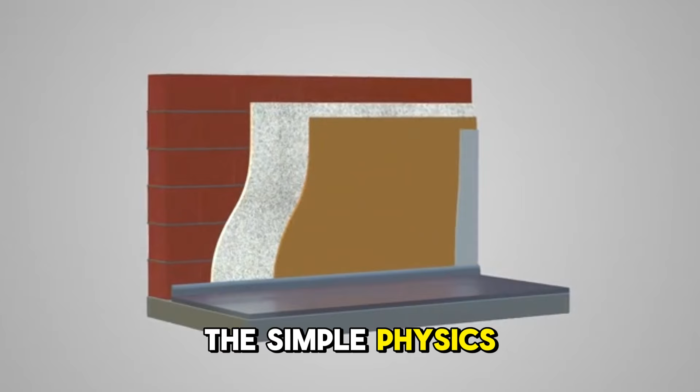Their secret wasn't magic or unlimited fuel. In fact, they had far less fuel than we do today. Their secret was thermal mass, the simple physics principle that modern heating has completely abandoned. Your metal stove gets blazing hot, heats the room for 2 hours, then goes cold.

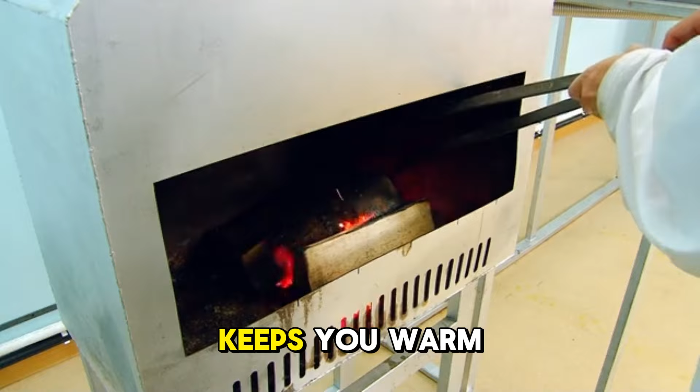Their brick ovens absorbed that same heat into thousands of pounds of masonry, then released it slowly throughout the entire day and night. Same fire, same fuel. But one keeps you warm for 2 hours, while the other keeps you warm for 24. The difference is physics that modern heating forgot.

Number 1. The wartime heating crisis. World War 2 created heating emergencies across every combatant nation that forced families to rediscover what their grandparents already knew. Coal, oil, and natural gas all went to military and industrial production first, leaving civilian populations with fractions of their

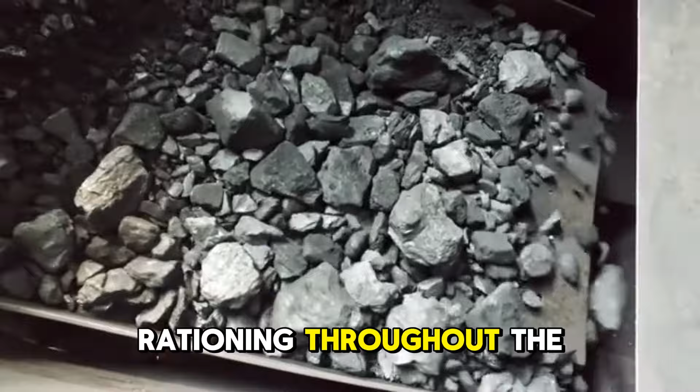normal fuel allocations. The Ministry of Fuel and Power in Britain implemented strict coal rationing throughout the war, and average households received nowhere near enough fuel to heat their homes using conventional methods. Germany faced even worse conditions as Allied bombing disrupted coal production and distribution networks. By the war's end, wood had become the primary heating fuel for many German civilians because nothing else remained available.

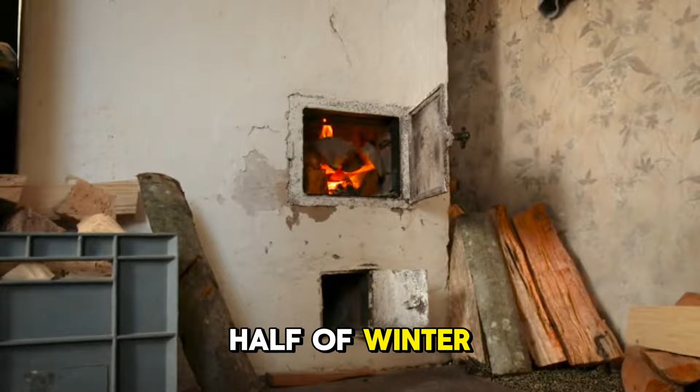The Soviet Union, Scandinavia, and Eastern Europe all confronted similar shortages that made every piece of fuel precious beyond modern imagination. Families with conventional metal stoves faced impossible choices: burn your entire fuel allocation in the first half of winter and freeze in the second half, or ration fuel so severely that you never actually get warm.

The physics of metal stoves made efficiency impossible. Hot metal radiates heat rapidly, meaning the fire must burn continuously to maintain room temperature. Stop feeding the fire, and the room goes cold within hours. But families with traditional masonry heaters experienced something entirely different.

One intense fire in the morning heated thousands of pounds of brick and stone to temperatures that remained comfortable to touch. That mass then radiated warmth steadily throughout the day and into the night, maintaining livable temperatures without any additional fuel, while neighbors with metal stoves shivered through the night. Families with masonry heaters slept warm under the gentle radiance of heat stored in brick.

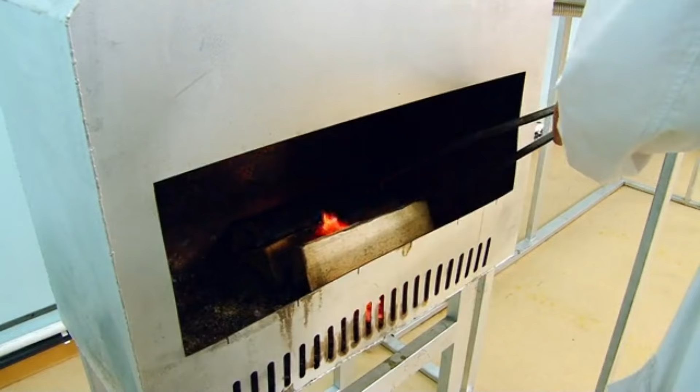The technology that saved those families wasn't new or experimental. Masonry heaters had heated European homes for centuries before the war. The physics was well understood, the construction techniques refined over generations, and the fuel savings documented by anyone who compared the two approaches. What the war did was reveal, under desperate conditions, which heating technology actually worked when fuel became scarce.

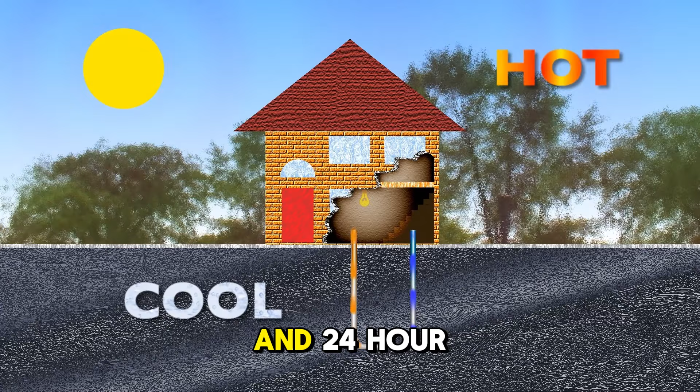Number 2, the physics of thermal mass. The difference between 2-hour heating and 24-hour heating comes down to a simple physics principle that modern heating systems have completely abandoned. Dense materials like brick, stone, and concrete absorb heat energy and store it within their mass. Once heated, these materials release that stored energy slowly through radiation, providing warmth long after the original fire has burned out.

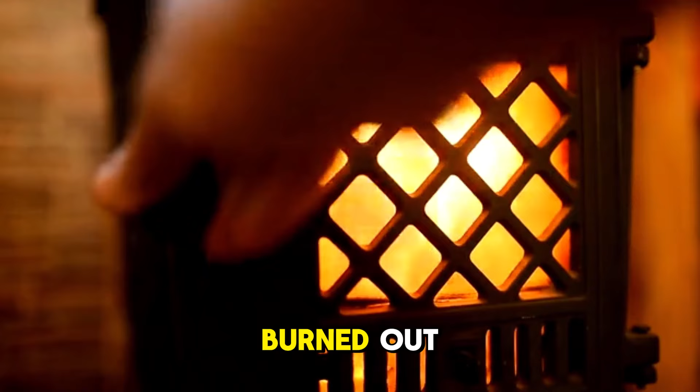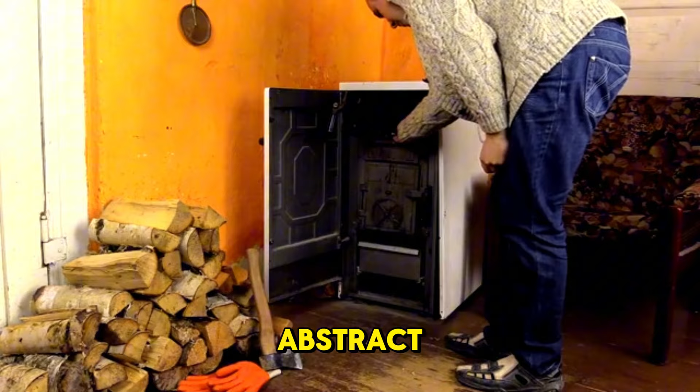The technical term is specific heat capacity, which measures how much energy a material can absorb per unit of mass per degree of temperature increase. Brick holds approximately 0.84 kilojoules per kilogram per degree Kelvin. This might sound abstract, but the practical meaning is profound. A 2,000 kilogram masonry heater raised 65 degrees above room temperature stores over 100,000 kilojoules of energy. That energy has nowhere to go except slowly radiating into the room over the following 12 to 24 hours.

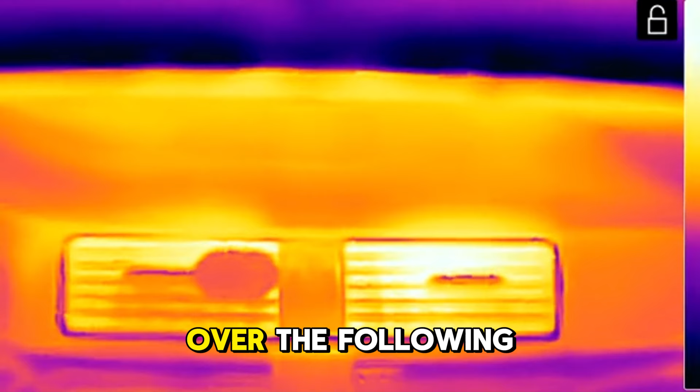Metal behaves completely differently. Steel has similar heat capacity to brick, but metal stoves weigh perhaps 50 kilograms rather than 2,000. The total energy storage capacity is roughly a 40th of what masonry provides. More critically, metal conducts heat extremely efficiently, meaning whatever heat it absorbs reaches the surface and radiates away almost immediately. High surface temperatures accelerate heat loss dramatically, so a metal stove at 600 degrees Fahrenheit loses heat far faster than brick at 200 degrees.

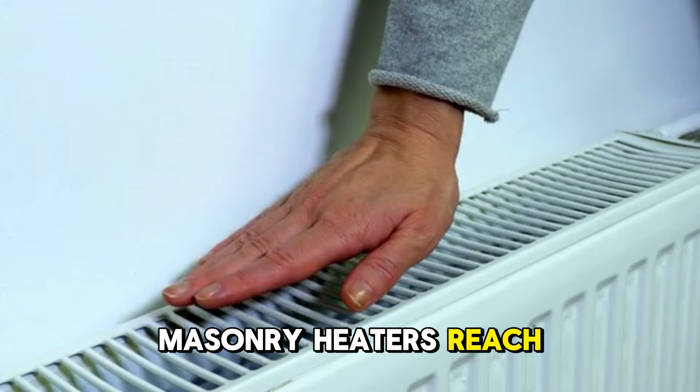This explains the fundamental pattern that wartime families understood intuitively. Metal stoves get dangerously hot while burning, then go cold within hours after the fire dies. Masonry heaters reach comfortable surface temperatures that remain safe to touch, then maintain those temperatures for an entire day because the massive heat reservoir depletes slowly rather than rapidly.

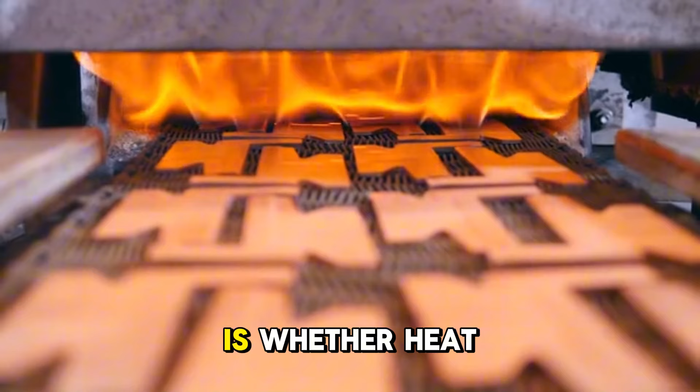The room doesn't know whether heat comes from a metal stove or a masonry heater. What the room knows is whether heat keeps arriving after the fire stops. With metal, it doesn't. With masonry, it does. That difference determines whether you wake up warm or wake up frozen when fuel runs short. Number 3.

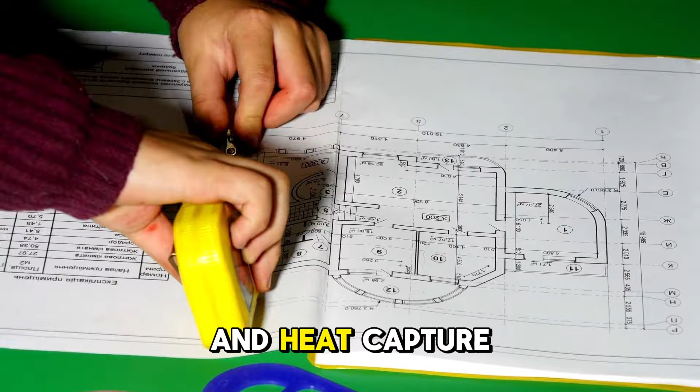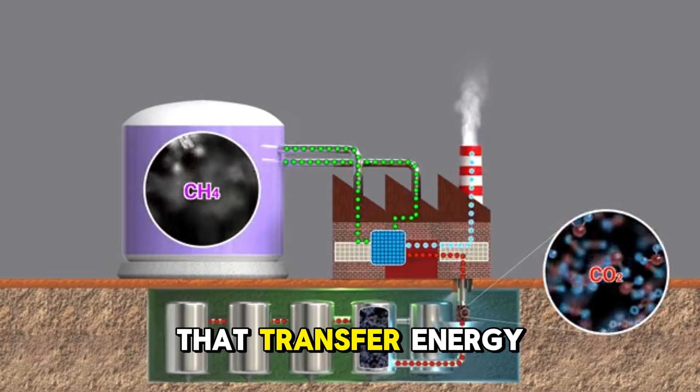How masonry heaters capture and store heat. The engineering of traditional masonry heaters maximizes both combustion efficiency and heat capture through design principles refined over centuries. Unlike metal stoves that send most heat directly up the chimney, masonry heaters force hot gases through extended pathways that transfer energy to surrounding brick before exhaust reaches the outdoors.

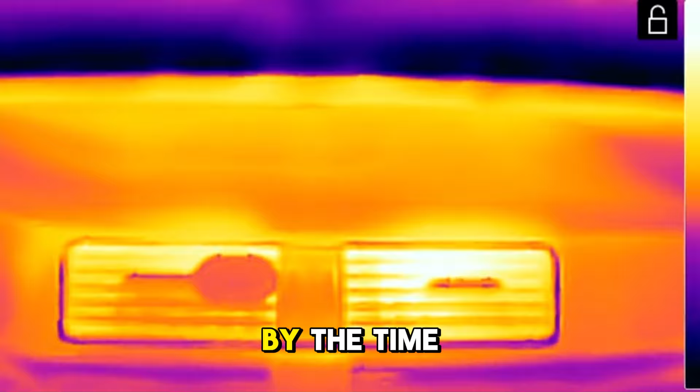The contraflow design represents the most sophisticated approach to heat capture. Hot combustion gases rise from the firebox, then travel through a maze of channels that may extend 20 feet or more before reaching the chimney. At each turn, at each pass through a channel, heat transfers from gas to masonry. By the time exhaust exits the building, its temperature has dropped from over 1,000 degrees Fahrenheit to perhaps 200 or 300. All that extracted heat now resides in the brick mass rather than floating uselessly into the atmosphere.

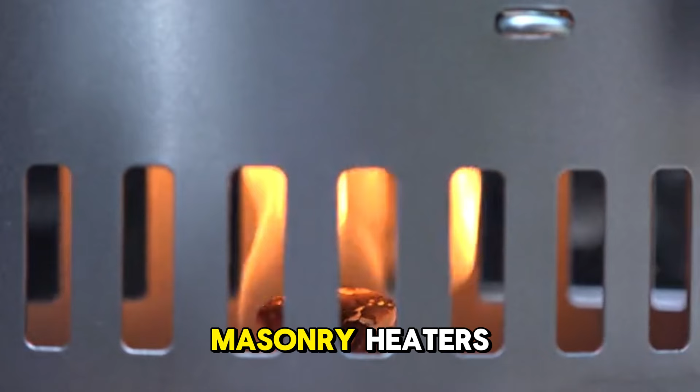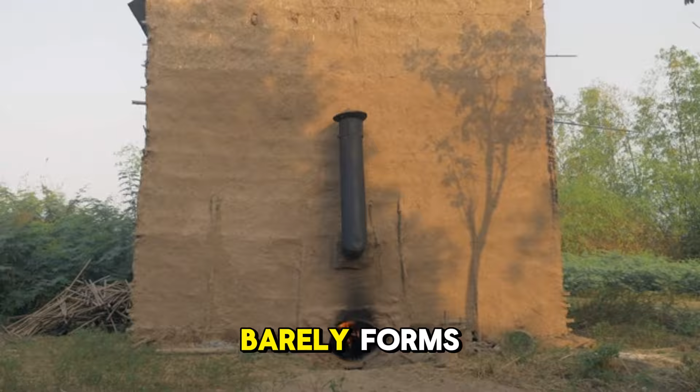Combustion itself operates differently in masonry heaters than in conventional stoves. The firebox is designed for intense, rapid burning at temperatures exceeding 1,100 degrees Fahrenheit. At these temperatures, volatile gases released from burning wood ignite completely rather than escaping as smoke. Creosote, the tarry residue that accumulates in chimneys and causes fires, barely forms because temperatures remain high enough to burn it. Combustion efficiency often exceeds 90%, meaning nearly all energy in the wood converts to heat rather than escaping as unburned fuel.

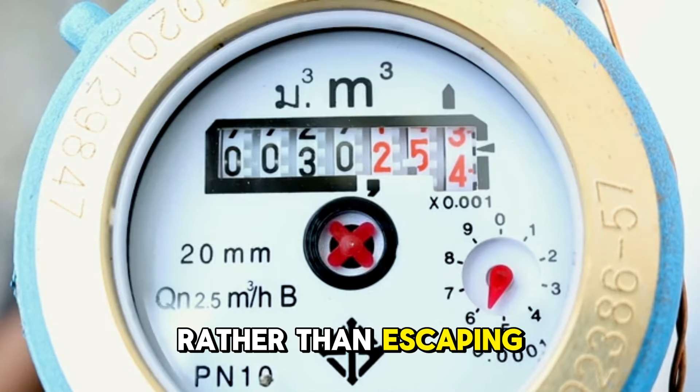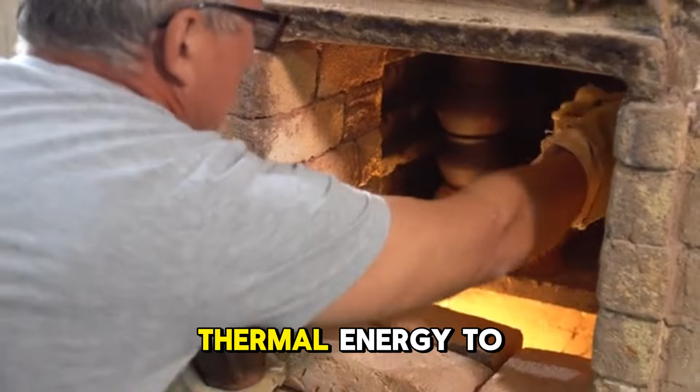A typical firing takes 1 to 3 hours and consumes 20 to 30 pounds of wood. This seems like modest fuel consumption because it is. The magic happens after the fire dies. Those 1,000+ pounds of brick now contain enough thermal energy to warm the room for the next 12 to 24 hours without any additional fuel.

Families fired their masonry heaters once in the morning and once in the evening, using perhaps 40 to 50 pounds of wood daily to maintain comfortable temperatures around the clock. Compare this to conventional metal stoves requiring 50 to 100 pounds of wood daily with constant attention and still producing uncomfortable temperature swings between firings. Same house, same winter, dramatically different fuel consumption and comfort levels.

Number 4. Regional traditions that survived the war. Different European regions developed distinct masonry heater traditions over centuries, each adapted to local climate, available materials, and cultural preferences. When wartime fuel shortages hit, families with these traditional heaters possessed advantages their neighbors with modern metal stoves could not match.

The German Kachelofen, meaning tile oven, features a brick or masonry core covered with decorative ceramic tiles. These heaters often stood built into walls between rooms, allowing a single unit to warm multiple spaces simultaneously. The tiles provided not just decoration but additional thermal mass and radiation surface. German and Austrian homes with Kachelofens maintained warmth through winters when coal deliveries became sporadic or stopped entirely.

Russian families relied on the pechka, a massive combination of stove, oven, and heating mass that often dominated the main room of traditional homes. The largest pechkas included raised sleeping platforms where family members could sleep directly on the warm masonry surface. Cooking, baking, and heating all happened from the same structure, maximizing utility from every piece of fuel burned. When German invasion disrupted fuel supplies, families with traditional pechkas possessed survival advantages that modern heating could not provide.

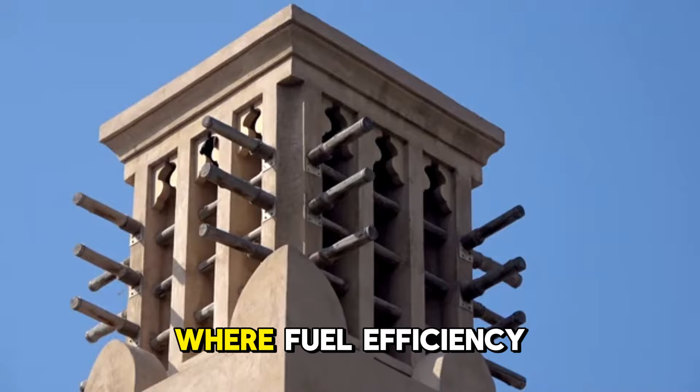Scandinavian countries developed their own refined designs suited to brutal northern winters. The Swedish Kakelugn featured tall, slender proportions that maximized radiation surface while minimizing floor space. Finnish masonry heaters often used soapstone, which holds heat even longer than brick. These designs evolved under conditions where fuel efficiency literally determined survival, producing heaters optimized over generations for maximum heat from minimum wood.

The British tradition differed somewhat, with range cookers like the AGA providing thermal mass through heavy cast iron rather than masonry. These continuous burning cookers stored heat for cooking while also warming the kitchen. Traditional brick bread ovens similarly retained heat for hours after firing, baking multiple batches while also radiating warmth into adjacent rooms. Each tradition survived because it worked under conditions where failure meant freezing.

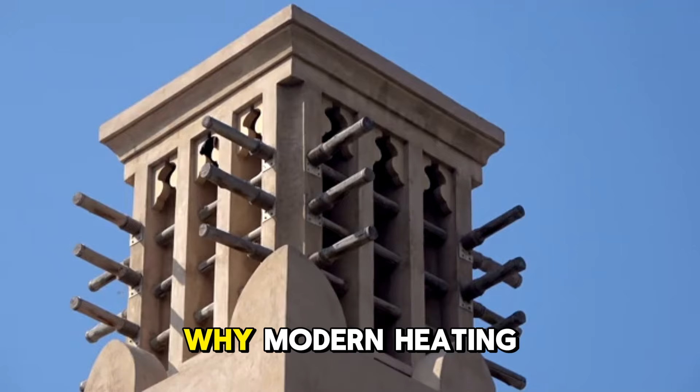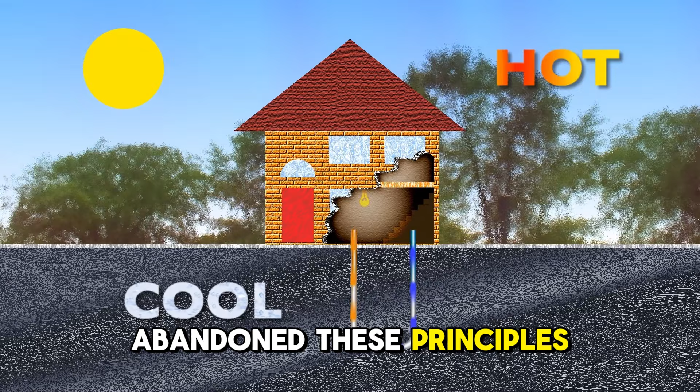Number 5. Why modern heating abandoned thermal mass. The shift away from thermal mass heating happened not because the physics stopped working, but because circumstances changed in ways that made convenience more valuable than efficiency. Understanding why modern heating abandoned these principles reveals what we sacrificed without realizing it.

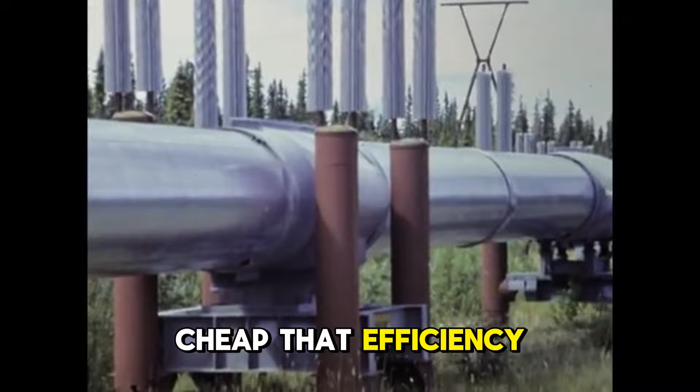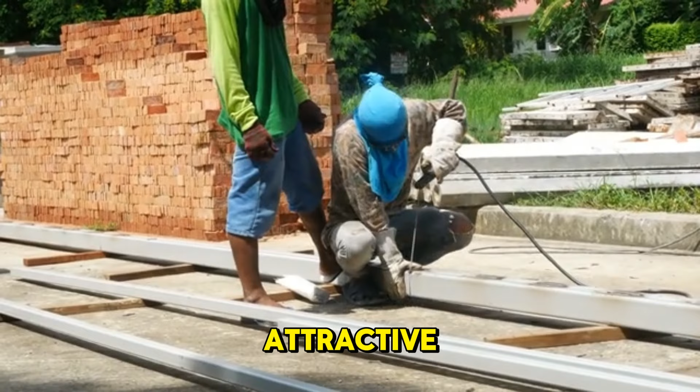Post-war petroleum abundance transformed energy economics almost overnight. Fuel became so cheap that efficiency improvements couldn't justify their costs. Installing a furnace took hours, while building a masonry heater took weeks. The labor cost difference alone made furnaces attractive regardless of ongoing fuel consumption. When oil costs pennies, burning twice as much doesn't matter financially.

Housing construction changed simultaneously. The post-war building boom emphasized speed above almost everything else. Tract homes went up in weeks using standardized designs and factory-produced components. Masonry heaters require custom construction by skilled craftsmen, reinforced floors to support weights exceeding several thousand pounds, and design integration that cookie-cutter floor plans cannot accommodate.

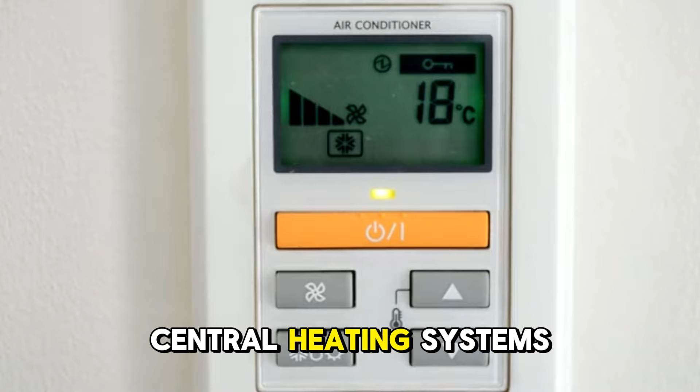The technology that had heated homes for centuries simply didn't fit the new way houses got built. Central heating systems offered convenience that thermal mass could not match. Thermostats maintained exact temperatures automatically. Furnaces required no skill to operate.

Fuel delivered by truck meant no wood splitting or fire tending. For families exhausted by wartime hardships, convenience represented luxury worth paying for. That ongoing fuel costs exceeded what masonry heaters would have required mattered little when fuel remained cheap.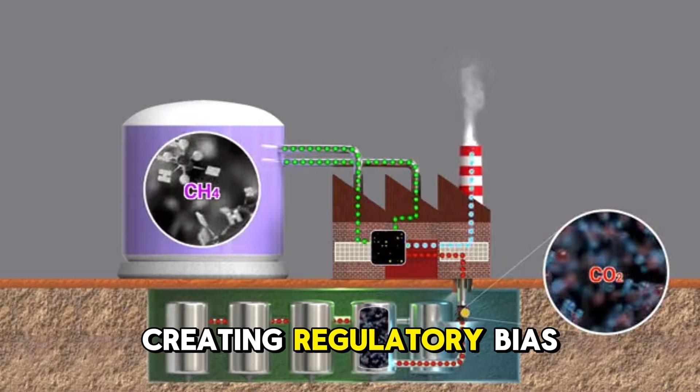Building codes evolved around the new systems rather than the old ones. Inspectors understood furnaces and could evaluate installations quickly. Masonry heaters required specialized knowledge to inspect properly. Code compliance became easier with conventional systems, creating regulatory bias favoring the less efficient approach.

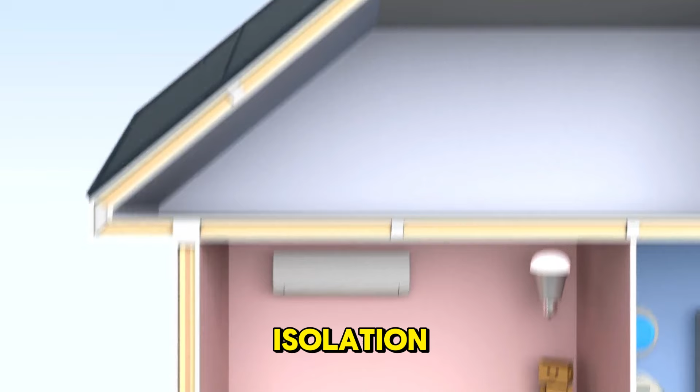Nobody made a deliberate decision to abandon thermal mass heating. 1,000 small decisions, each rational in isolation, accumulated into a complete transformation of how we heat our homes. Efficiency sacrificed for convenience. Independence sacrificed for ease. Long-term savings sacrificed for lower upfront costs.

Number 6. The real cost of modern heating. The heating systems that replaced thermal mass technology carry costs that most homeowners never calculate fully. Energy bills represent only the most visible expense. Dependency, discomfort, and vulnerability create costs that don't appear on monthly statements but affect quality of life continuously.

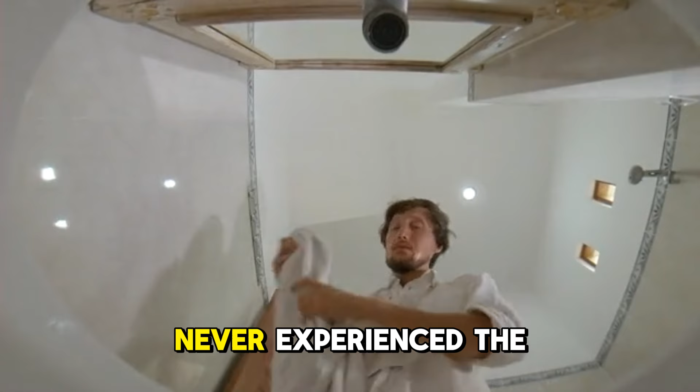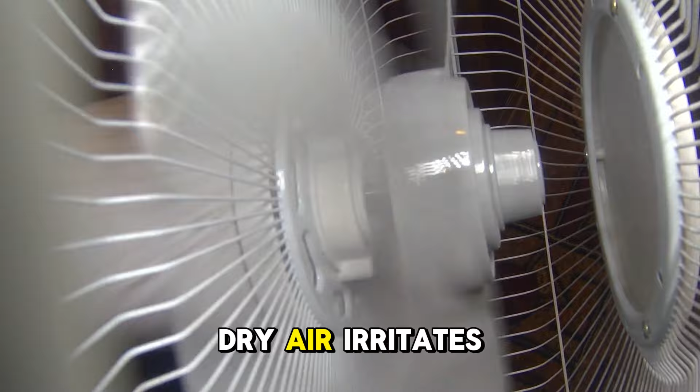Modern forced air heating creates uncomfortable living conditions that occupants accept as normal only because they've never experienced the alternative. Warm air rises and stratifies, leaving floors cold while ceilings overheat. Blowers create drafts and noise. Dry air irritates respiratory systems and requires humidifiers to counteract.

Temperature swings between cycles mean the house is either too warm or too cool, but rarely just right. This is what we accept as normal heating because we've forgotten what good heating actually feels like. Dependency on external systems creates vulnerability that masonry heater owners never face.

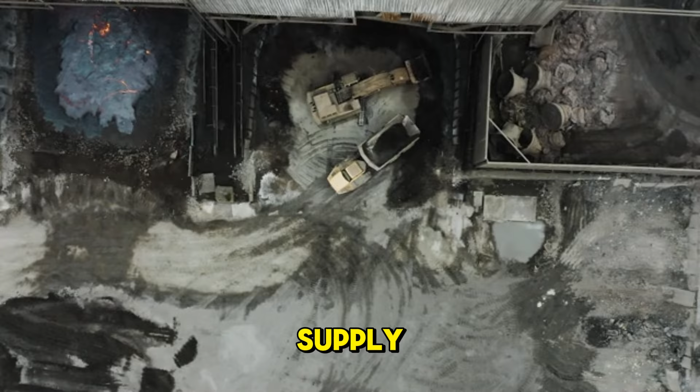Grid power failure stops your furnace regardless of fuel supply. Gas line disruption leaves you cold. Delivery delays during storms mean empty tanks at the worst possible time. Every component of modern heating depends on infrastructure beyond your control. And that infrastructure fails more often than most people admit until they experience it personally.

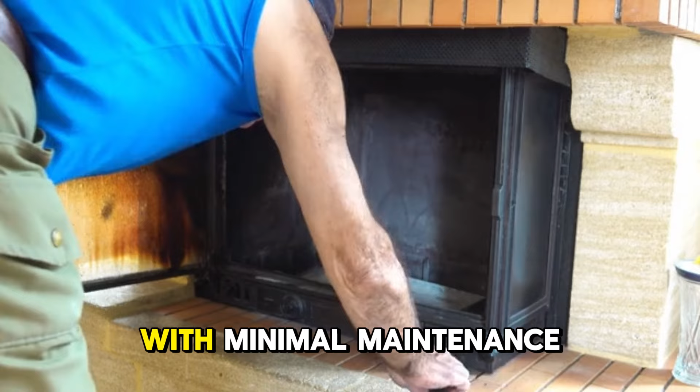The financial comparison between fuel costs is deceptive because it ignores system lifespan and maintenance requirements. Furnaces last 15 to 20 years before requiring replacement. Masonry heaters last 50 years or more with minimal maintenance. The higher upfront cost of masonry construction amortizes across decades of service, while furnace replacement costs recur again and again.

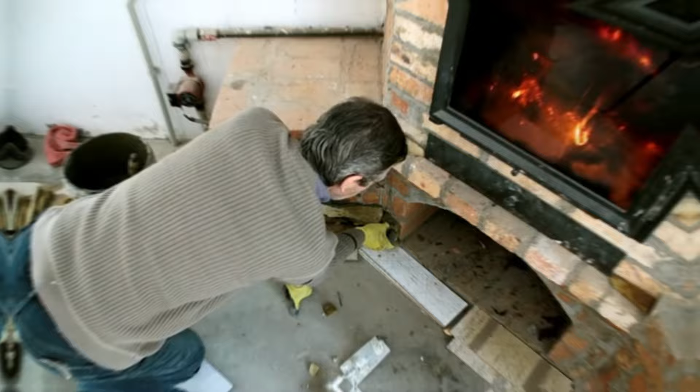Most significantly, modern heating requires purchased fuel continuously, while masonry heaters can operate on wood harvested from your own property. For anyone with access to even a few acres of woodland, masonry heating offers genuine independence from energy markets and delivery systems. Your heating supply answers to no one except your willingness to cut and split wood.

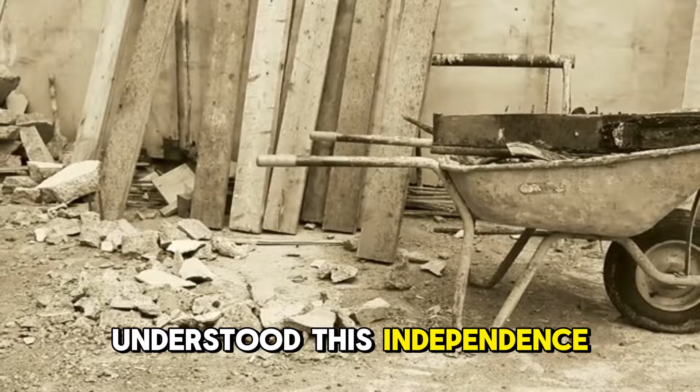The wartime families who heated with masonry understood this independence viscerally. When coal stopped arriving, they still had warmth. Their neighbors with modern stoves did not.

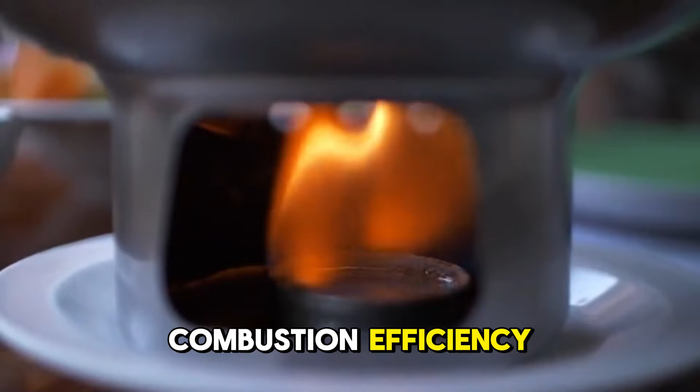Number 7. Bringing thermal mass heating into the future. The physics that made masonry heaters effective during World War II hasn't changed. Brick still stores heat. Mass still radiates warmth slowly. Combustion efficiency still exceeds what metal stoves can achieve. What has changed is growing recognition that the convenience we traded for these benefits may not have been worth the price.

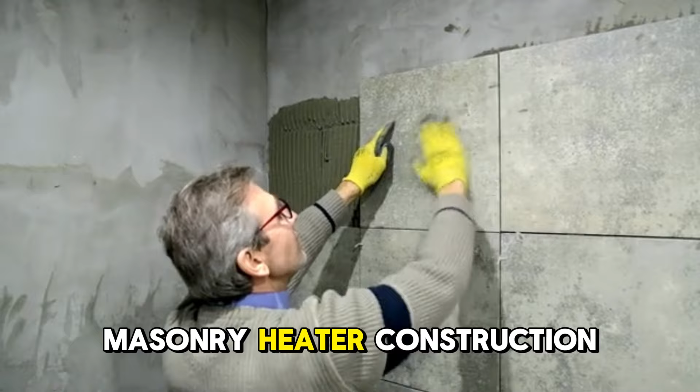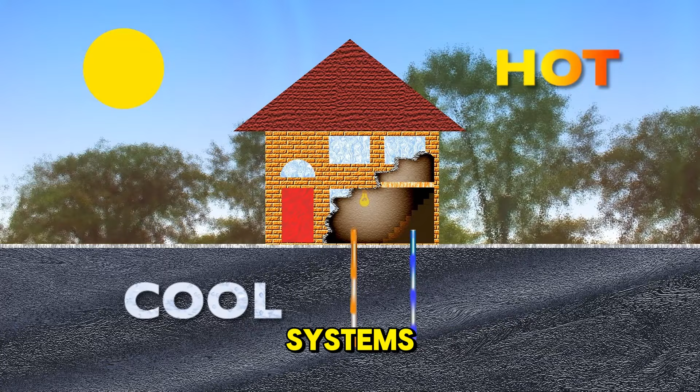Modern masonry heater construction has advanced significantly from wartime technology. Modular core systems allow faster installation while maintaining traditional efficiency advantages. Glass doors permit fire viewing that solid brick historically prevented. Integration with hydronic systems allows masonry heaters to feed radiant floor heating throughout the house. EPA-compliant designs satisfy modern emission standards while delivering the efficiency that drew people to masonry heating originally.

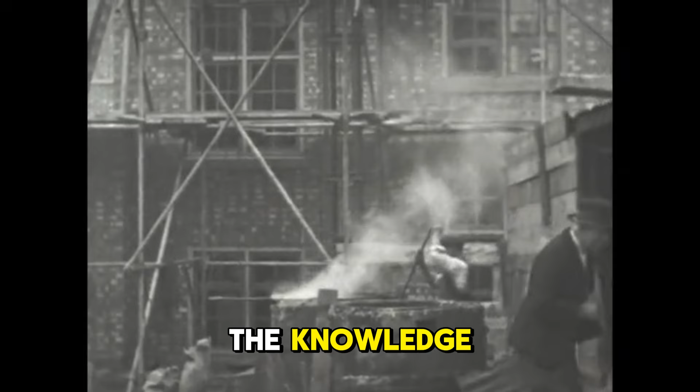Organizations like the Masonry Heater Association of North America train builders in both traditional and modern techniques. Annual conferences advance the craft while connecting homeowners with qualified installers. The knowledge that almost disappeared during the post-war shift to conventional heating is being reconstructed and expanded.

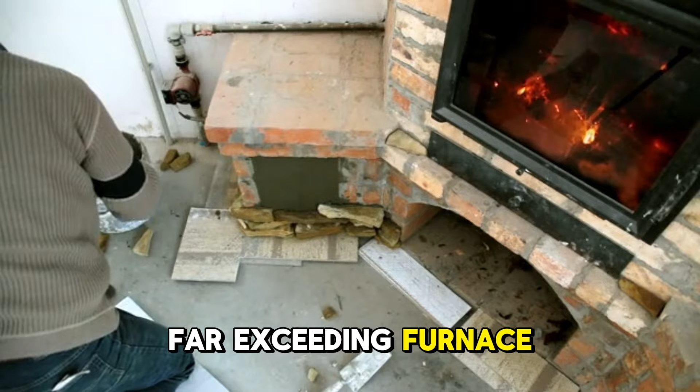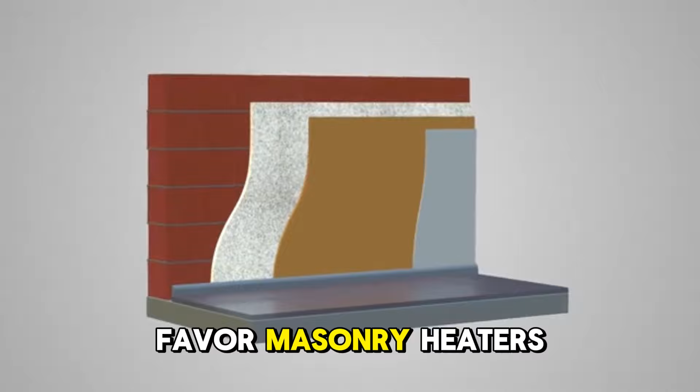Cost remains the primary obstacle for most interested homeowners. Custom masonry heaters typically run $15,000 to $30,000 installed, far exceeding furnace installation costs. Modular systems reduce costs somewhat, but still require significant investment. However, operating costs over a 20-year period often favor masonry heaters, particularly for homeowners with wood access. The calculation depends heavily on local fuel prices, climate severity, and how much value you place on energy independence.

The deeper question isn't whether masonry heaters make financial sense, it's whether we're willing to reconsider the trade-offs our grandparents' generation made under very different circumstances. They had cheap fuel and craved convenience after years of wartime hardship. We have expensive fuel, vulnerable infrastructure, and growing awareness that independence has value beyond what spreadsheets can calculate.

One fire in the morning, warmth until midnight. The families who survived the war's worst winters knew this was possible because they lived it. The physics hasn't changed. Only our choices have changed.